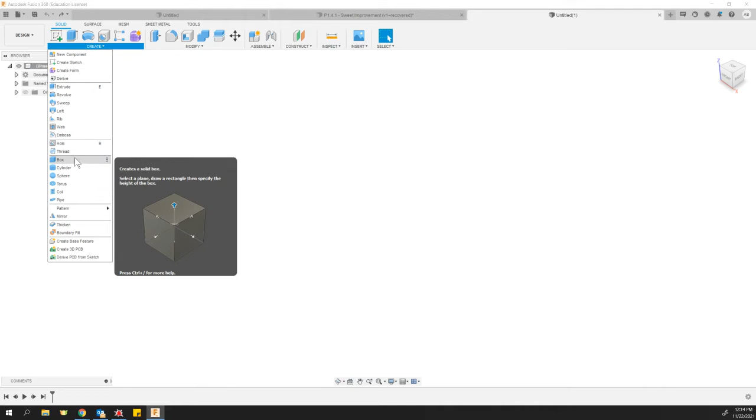Okay, real quick, let's open up Fusion. And we're going to start by creating what's called a primitive. Instead of doing a new sketch, we're going to just go straight down here to box, and we're going to create a new box on the base surface. It wants me to click once to start my starting point and then move my mouse. I'm going to make my box a simple 3 inches, hit tab to go to the width, make it 3 inches wide as well, and then enter.

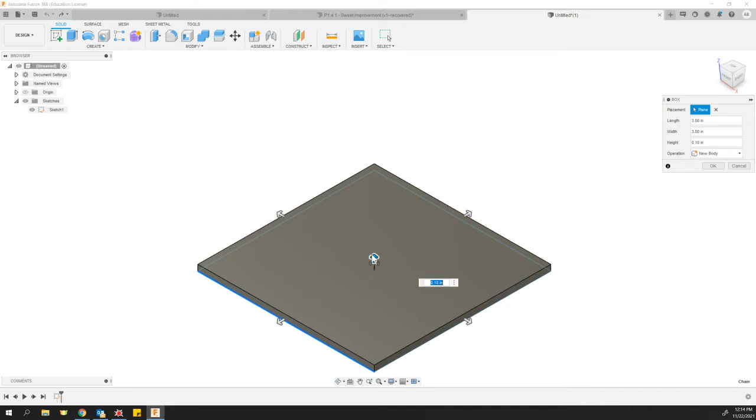Now I'm going to extrude it up a distance of, I don't know what I'm looking for here, but maybe let's call it 2 inches. Give it a good 2 inches.

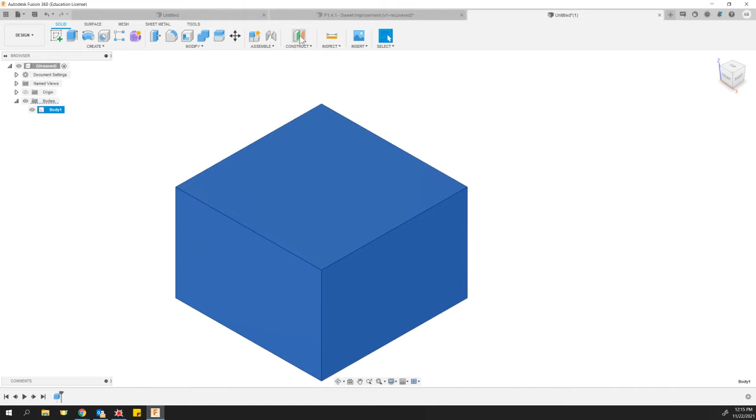All right, so from here, we haven't done this in class yet, but it's a fairly simple process. We've just got one body, as we can tell over here in our bodies folder. Now what I'm going to do is place a construction plane. We have used construction planes, specifically offset planes. I'm going to place a plane on top of the box, and then sink it down a half an inch, a distance of negative 0.5, and that puts an imaginary plane slicing through my box here.

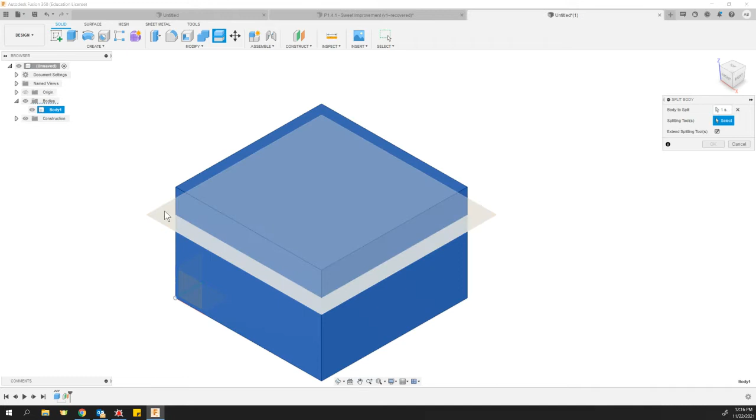So at this point, I'm going to use this feature up here called Modify. This is called Split Body. I'm going to go ahead and split this solid body, which I have one of, so I'll select it. Now I'm going to choose my splitting tool with this picker, and choose this construction plane as the splitting plane. I'll click OK. And now what we've just done is we've split our one body into two bodies.

Okay, I'm going to go ahead and turn off my construction plane, that ugly yellow plane. And I can go ahead and turn off my lid body as well, so I'm just looking at the box part.

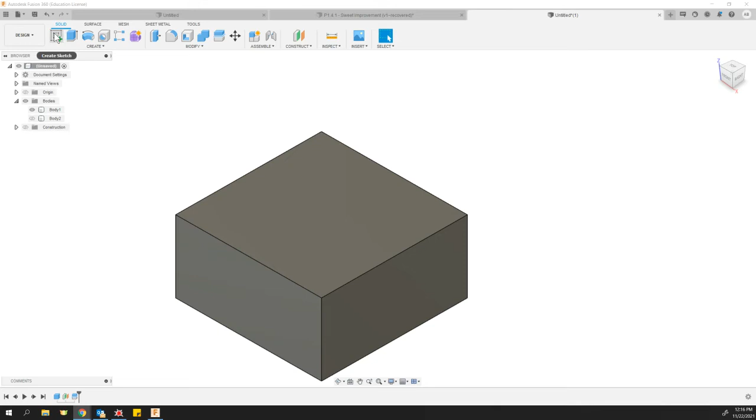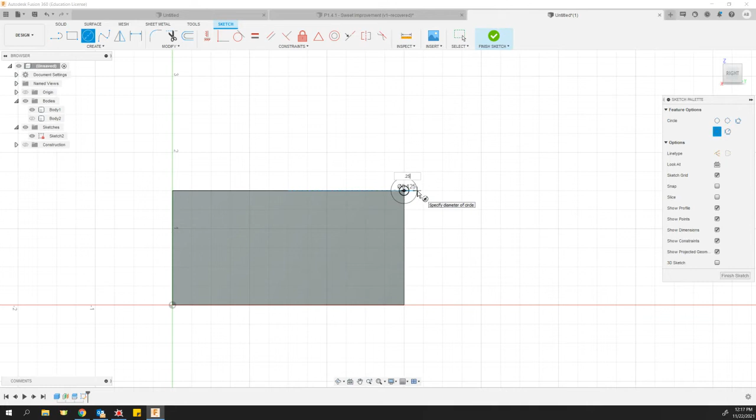Okay, at this point let's go ahead and start our hinge. We're going to do that by sketching on the side view of our box. Just to keep things simple, we'll just do a couple of circles based on the corner here. I'm going to do one at 0.125, which is where the pin goes through, and then another circle, concentric, sharing the same center, at 0.25, twice as big. I'll move those dimensions out of the way so they're not confusing me.

All right, so now that we've got our two circles sketched, we're going to go ahead and say Finish Sketch, and we're going to extrude that circular ring shape all the way through this part.

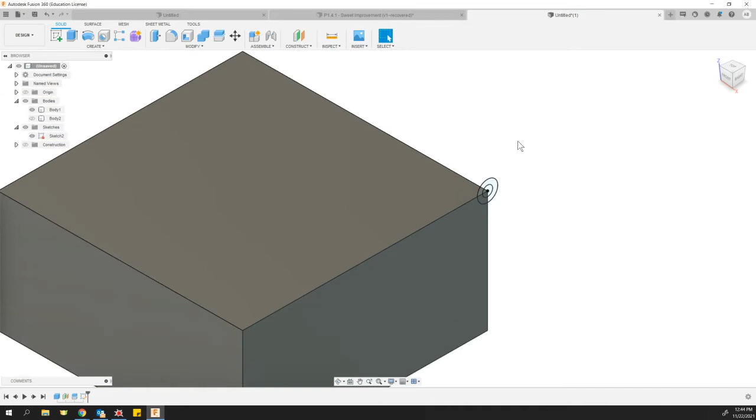So to do that, we'll extrude. We'll choose this ring shape, and instead of coming out this way, let's actually join it across this way, that same width—if you recall, the width was 3 inches. And it is saying it's a negative distance this time, so we're just going to call it negative 3 inches. We'll just verify that, yes, it is in fact joining to what we previously had. So we'll say OK.

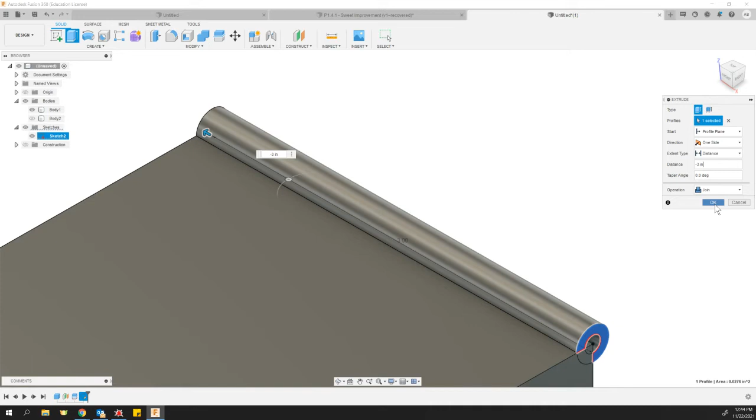Now the only thing that bothers me is this little sharp edge is still in here where we would want our hinge pin to go. So what we're going to do is extrude again.

Okay, but our sketch is gone. That's because we've already consumed or used that sketch. It's still there, and we can reactivate it by going over here in our browser to sketches. Let's open that side arrow to open the folder, and turn on that sketch, which was turned off when we used it the first time.

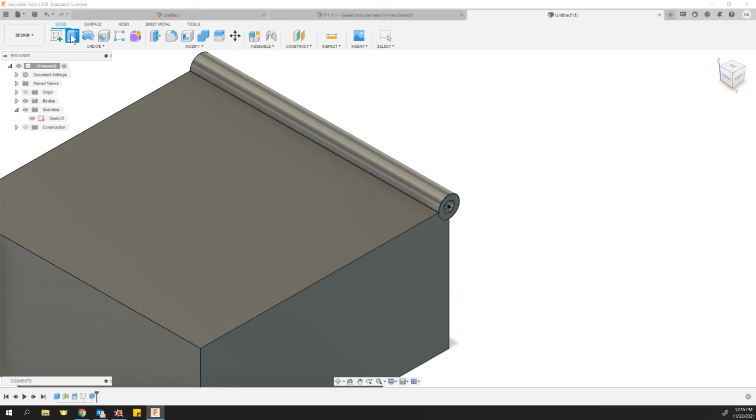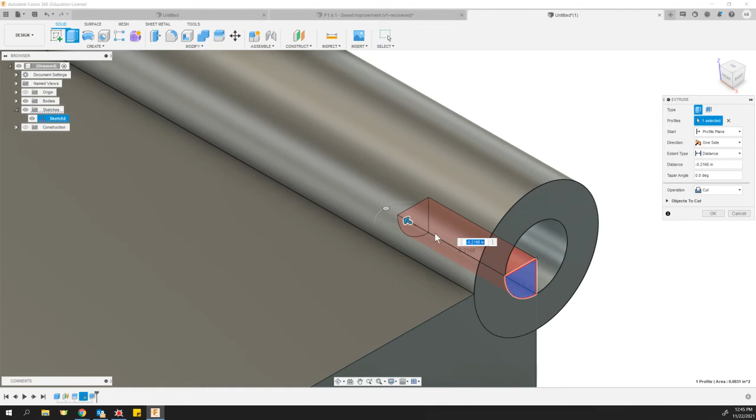So now we are again going to extrude. Let's make sure that sketch 2 is visible, and we're going to extrude this little portion in here. Instead of adding again, we're going to remove that. Since there was already an object there, when I go this way, it's turning red, which means it's a cut, which is what we're looking for. So let's cut that same distance of a -3 inch extrude, and it should remove that, and it does. Well, that's pretty nice.

We can go ahead and say we're done with that sketch now, so we can turn that off, and we are almost done with this bottom portion of the box. The only thing I want to do now is slice this tube so it's not solid all the way across. This will make more sense when we do the same thing for the lid.

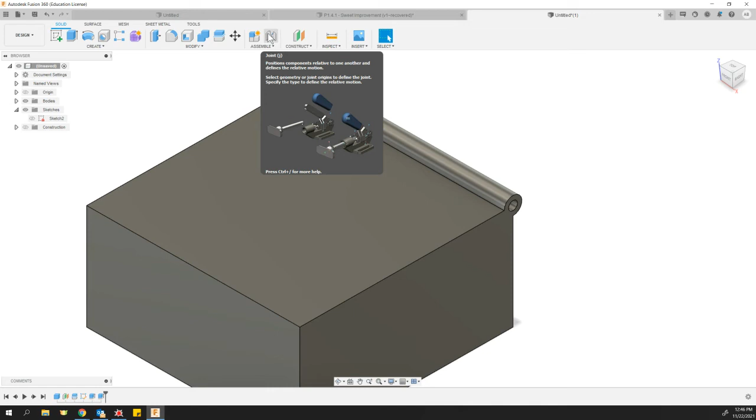So the most simple type of hinge I can think of is half of this tube is going to remain on the bottom portion of the box, the main portion, and then the other half we're going to remove, which will be connected to the lid portion. Probably not the best hinge design in the world, but it's going to resemble what's actually shown right here in the symbol. You can see that half of the tube is on the bottom and half the tube is on the lid part.

All right, so to do that, we're going to use a construction plane once again, and we're going to put the plane offset of this face. So we're going to choose to put it on this face, and then move it back using the little arrow, halfway the width of the object, which is, since it's 3 inches wide, halfway the width would be -1.5, wouldn't it?

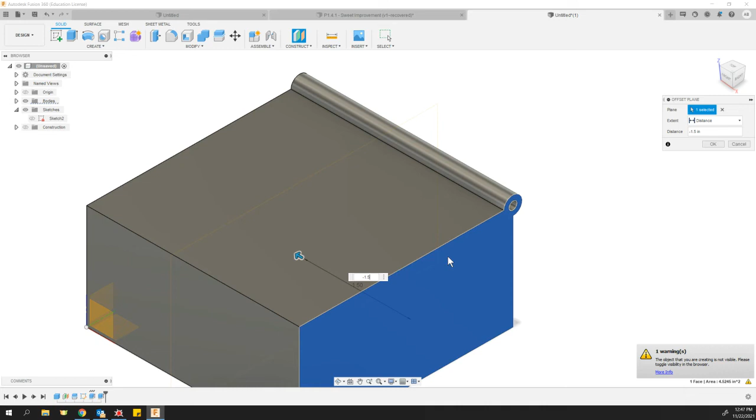-1.5 inches. That does put a line in the center. So we'll say enter, and oh, it gave me an error. Oh, that's because I had previously turned off the construction planes. Instead of turning off all construction planes, what I should have done was open that folder and turn just plane 1 off, which is what I've now done. So now I can see plane 2.

That's where I'm going to slice this portion right here. So again, remember when I said we were done with sketch 2? We actually weren't. Let's go ahead and edit this. Well, how are we going to do this? Let me think for a second.

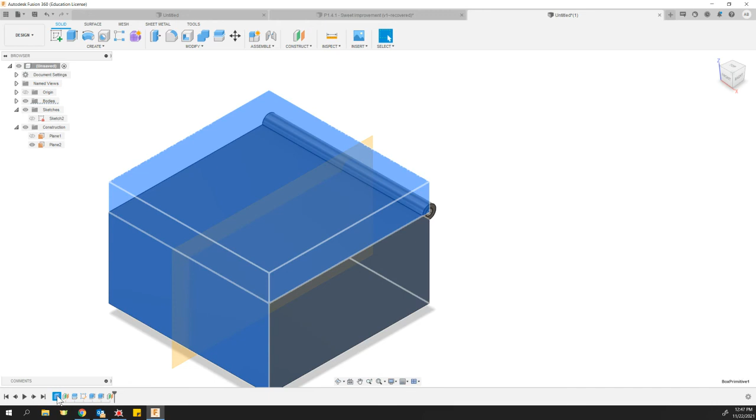Let's go down and look at my timeline. Okay, I started with a box, I split it, then I sketched on this surface the circle, and I extruded once as the tube and then once as removing. Let's go back in here and actually edit both of those extrudes. You see where I'm down here in the bottom? Instead of making them go the full width across, let's just make them go a width of 1.5.

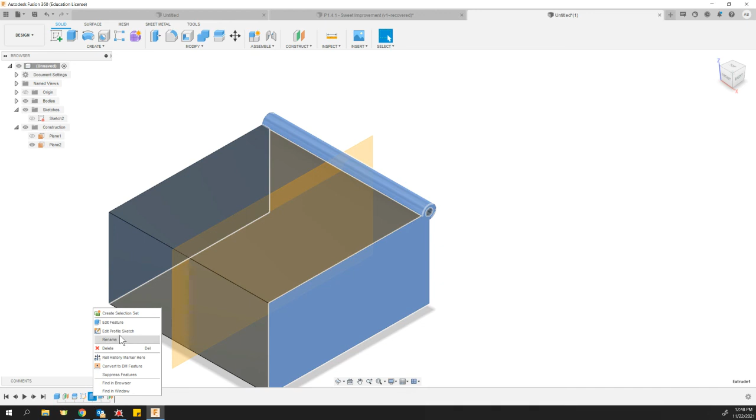So I will right click on both of those extrudes, and go to edit feature, and bring that back a distance of just 1.5. Forgot to put negative, didn't I? So there we go, cool with that one. And I'll do the same, and it comes up to meet my plane. That makes sense. I'll do the same with the second extrude.

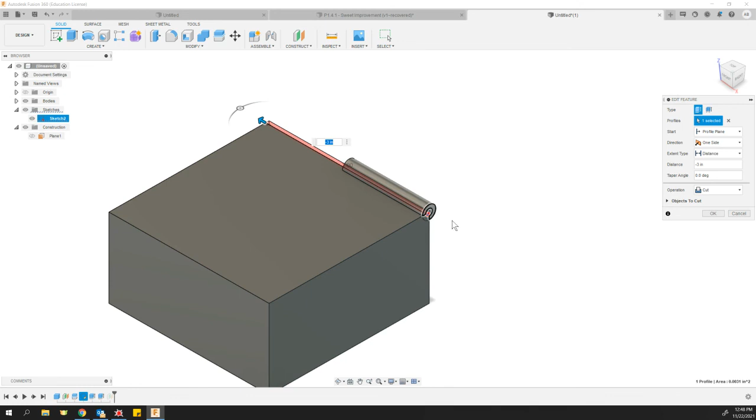Okay, now that's a cut, so we want to leave that as it is. What that means is it's actually removed that corner right there, and that's going to be fine. We want that to be removed the whole time. So I think we're ready here, folks. I'm going to go ahead and go back to home. I'm going to say okay, and we're ready for video number 2.